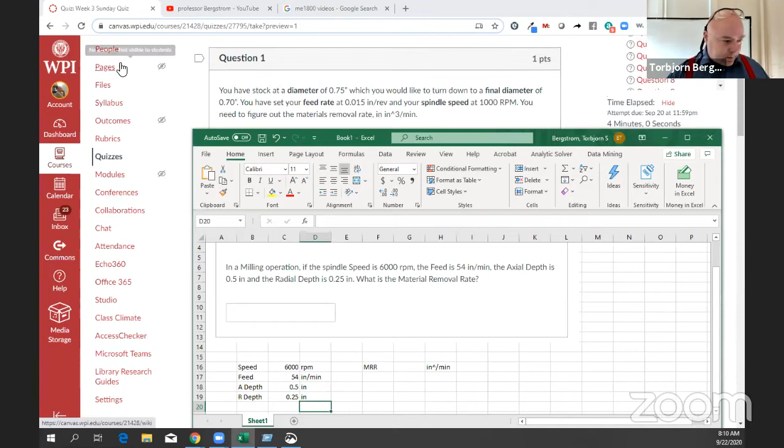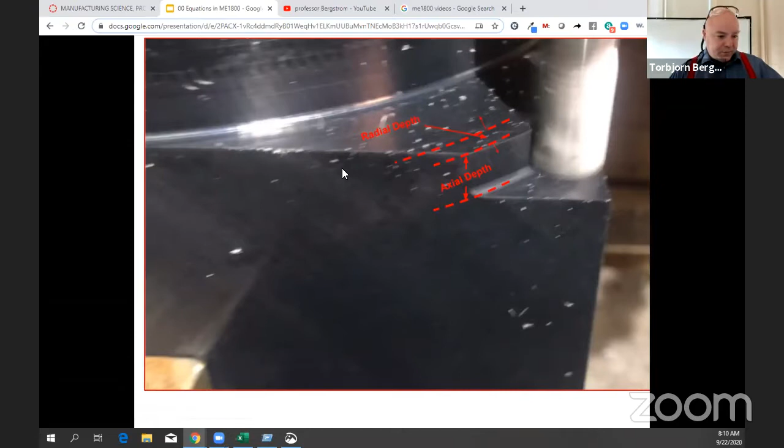So if we know the feed in inches per minute, we know the depth in inches, and we know the width in inches. Axial and radial depth, one of them is the depth down, the other one is the width of cut. I never remember which one is which, but I do remember that if I go to my ME1800 equations spreadsheet, ooh, it's labeled. Radial depth is the width of cut. Axial depth is the depth of cut. Okay, so now I remember that.

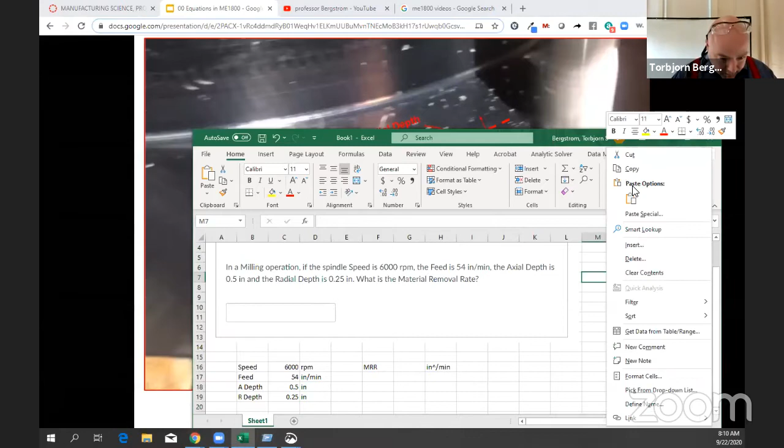And if I want to make sure that I don't forget that with my problem here, I can again snip that, copy it, and go back to Excel. I could paste that so that I don't forget that.

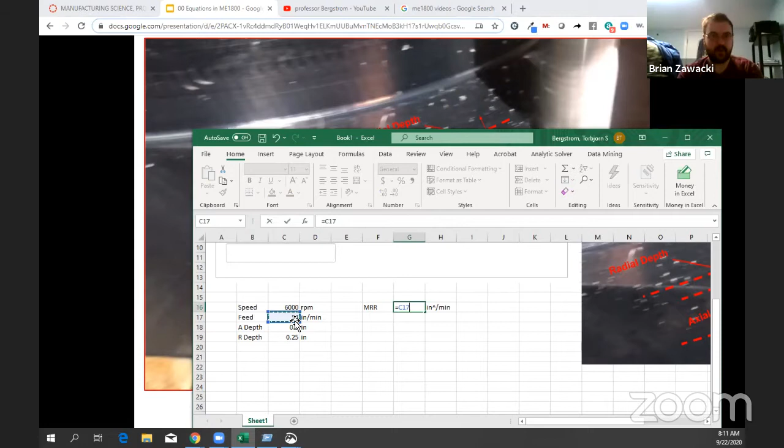But so if I take axial depth, radial depth, and multiply by each other, now I have an area, right? And if I multiply that by the distance per minute that area goes through, so this equals this one. Excuse me, I'm so sorry. Times this one, times this one. And the RPM was information you didn't need.

If this unit changed to inches per flute, though, you would need to know the number of flutes and the RPM to convert it to inches per minute. And that's probably what I meant to have you do, but the problem says inches per minute, so it's simply multiply the feed rate by the axial depth and the radial depth, you get inches cubed per minute.

And so that's what I mean for you to do. And then you could say, what is this? Material removal rate, and you could name the little sheet there so that next time you want to do a problem like that, you can come back to that sheet. So that's the intent. And we won't be collecting the Excel spreadsheet again unless you make some changes to it and you want me to look at it, and then we can just do that. But the idea is that you build a set of mathematical models that you can use in answering further questions, whether they're part of this class or for something else, and to learn the skill of doing that.

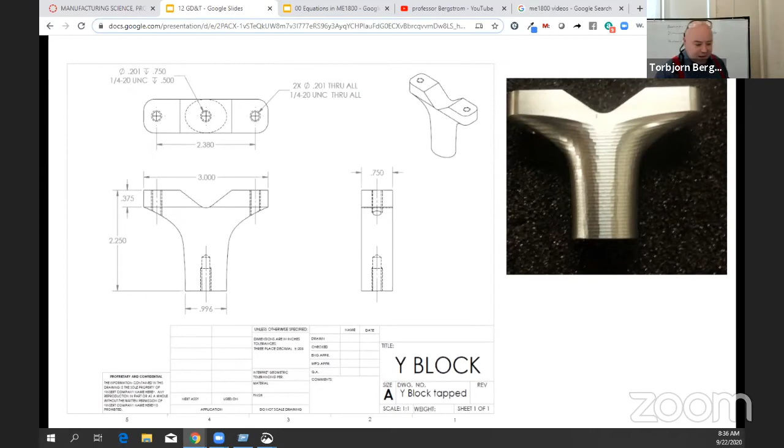So if I was going through one of those holes, what's the diameter of the holes? Those holes are 1.005 inch in diameter, right? Nominally. So the holes that go through the part, there's 4 of them.

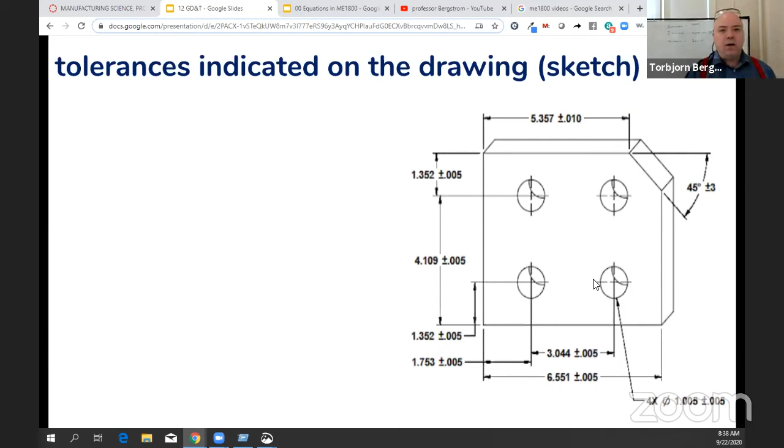Now what if I had a shaft that was 1 inch minus 0.01 inches plus 0? Then would it always fit in the hole? Yeah. Okay, all right, so I'm going to stop the screen share for a second.

So if I have my plate, it's got one hole in it, and we said that hole was 1.005 plus or minus 0.005. And so this means it goes from 1.010 to 1.000, that's the range the hole can be.

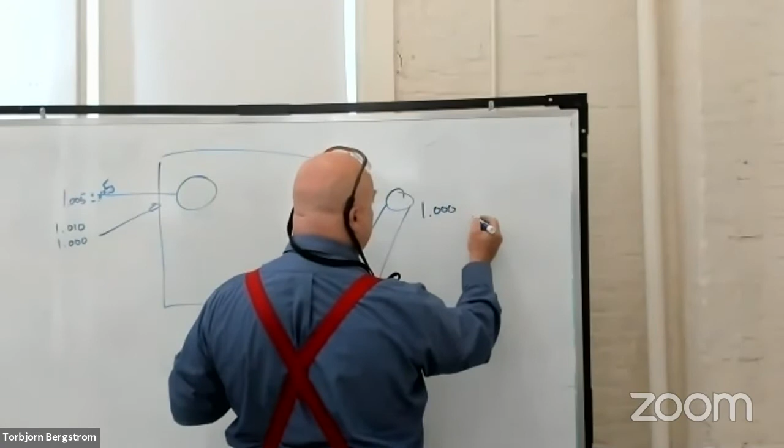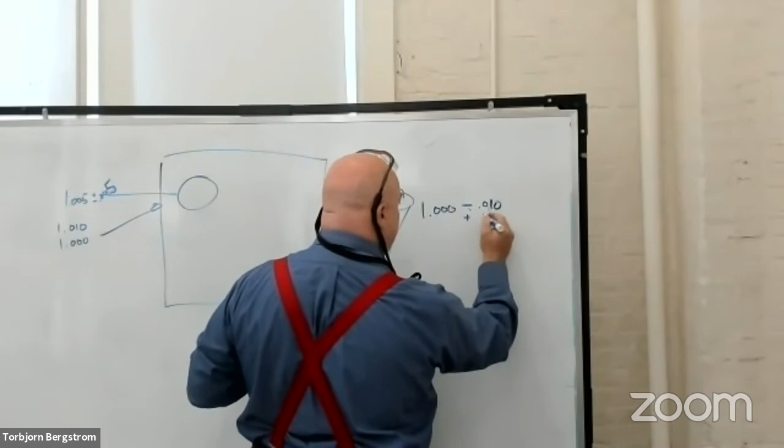And if I've got a shaft, and it is 1.000 minus 0.01 plus 0, then that shaft always fits in the hole.

And if we had 2 of these plates and we stacked them on top of each other, we could always put the shaft through and it could locate the 2 plates relative to each other, except they'd be able to spin relative to each other because it wouldn't orient them, but it would at least put them together.

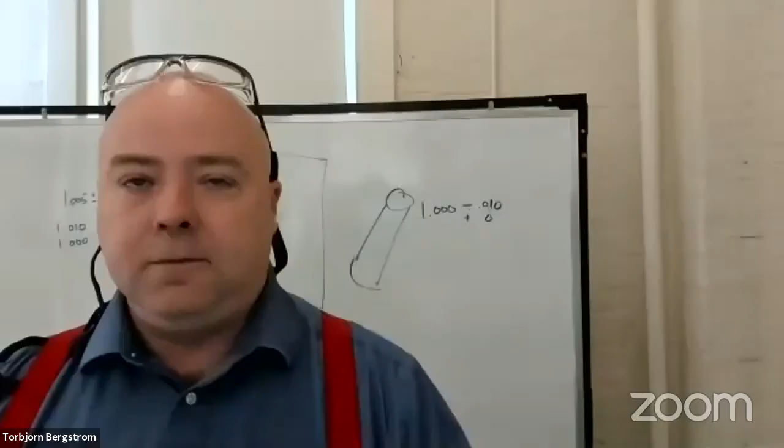Now, what if the shaft was bigger than the hole? Could I still assemble it? Maybe, but you probably shouldn't. I don't know, it depends on your intent. I could press harder and the shaft would go in the hole, right?

And we sometimes do that. We call that an interference fit, where we know the shaft is bigger than the hole and we want to push it in because we don't want it to come back out again on its own, we want it to stay there. So in this case, we want it to be a slip fit. We want the shaft to go in the hole and be able to come back out. We can put these things together, we can take them apart. Okay.

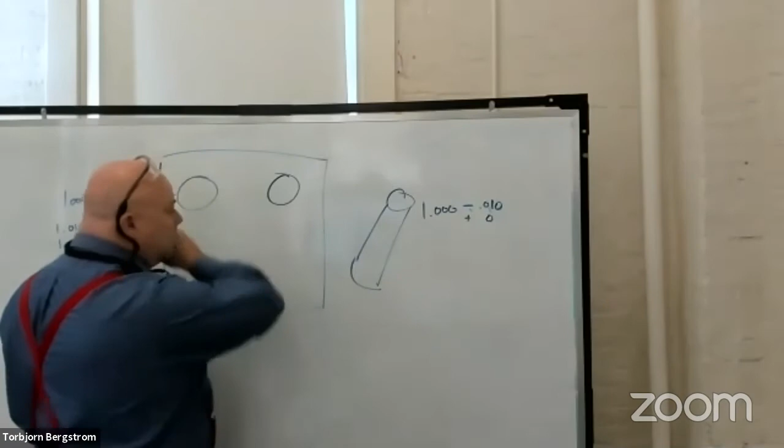But now I want to control the orientation also. So I put another hole, and now this is times what? 2x typical. Right? And so that applies to this dimension. So both holes have the same tolerance and dimensions.

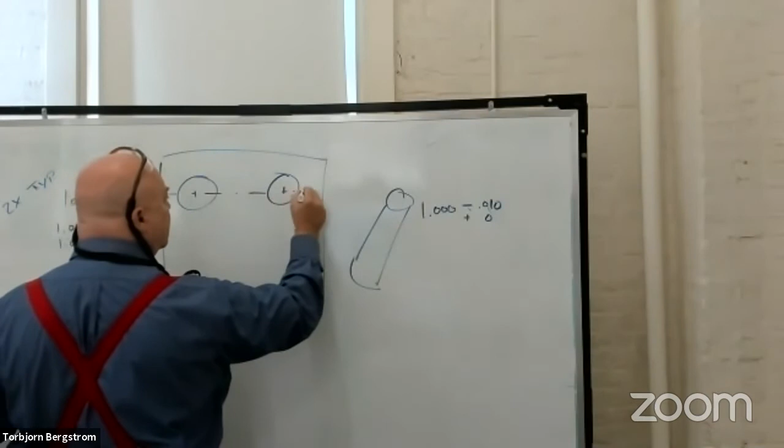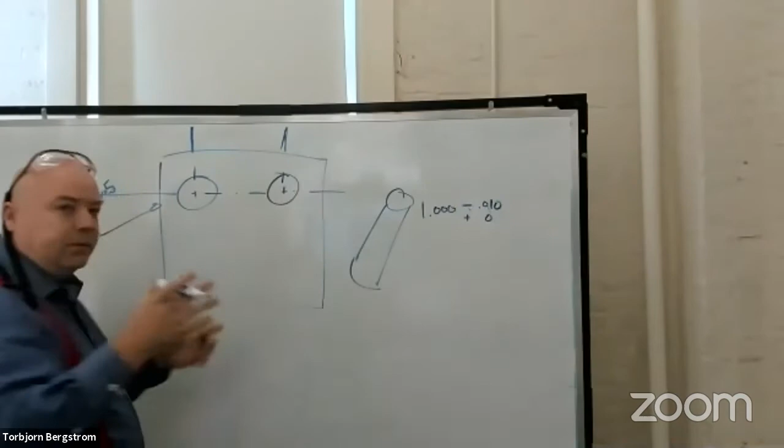What do I also have to do now? If I'm going to make the 2 plates, I'm going to make the 2 shafts, I have to know the distance between them, right? So I have to be able to measure this distance.

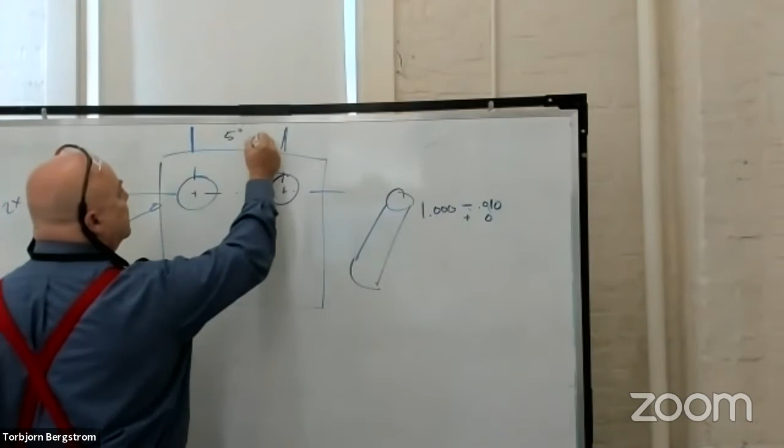In order to be able to assemble both plates together and put both shafts in, let's say this is 5 inches. What does the tolerance on 5 inches have to be? .01 inches, plus or minus. All right, so it's 5 plus or minus 0.01.

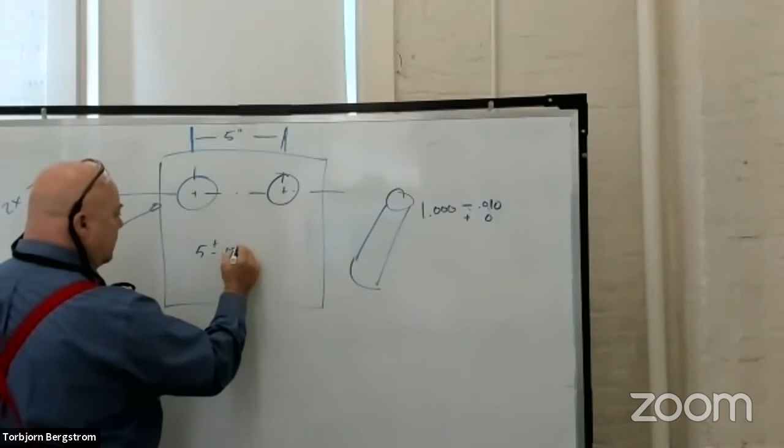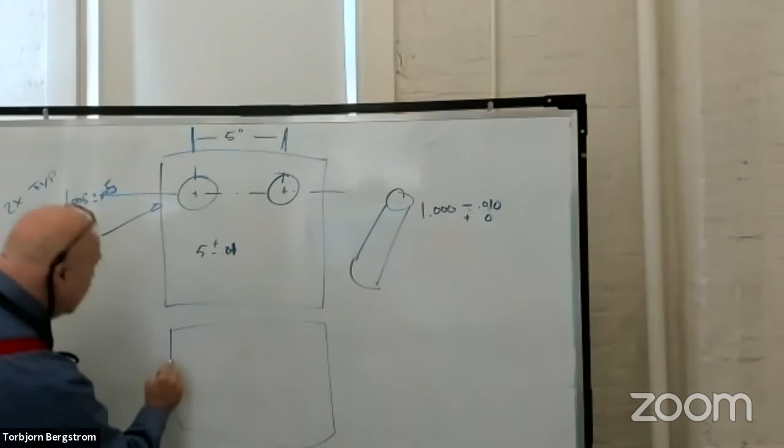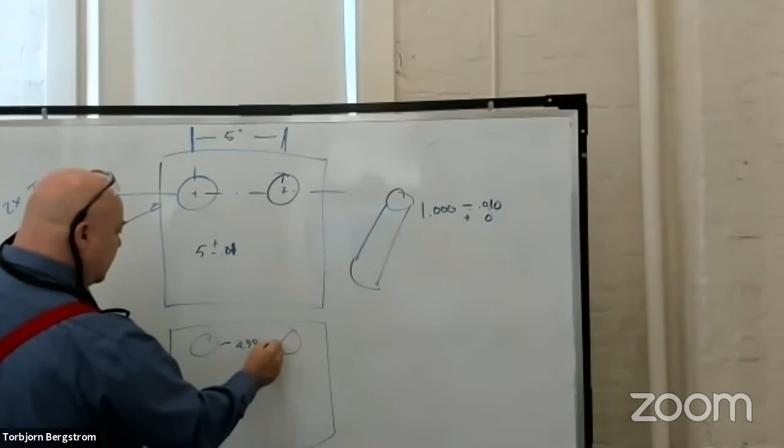So that means that they could be, so 1 plate, because now we got 2 plates, right, that are fitting together. This one could be 5 plus 0.01, and this one could be 5 minus 0.01. So what's that? 4.99, right? So this one's 4.99, this one's 5.01, and the shaft is 1.

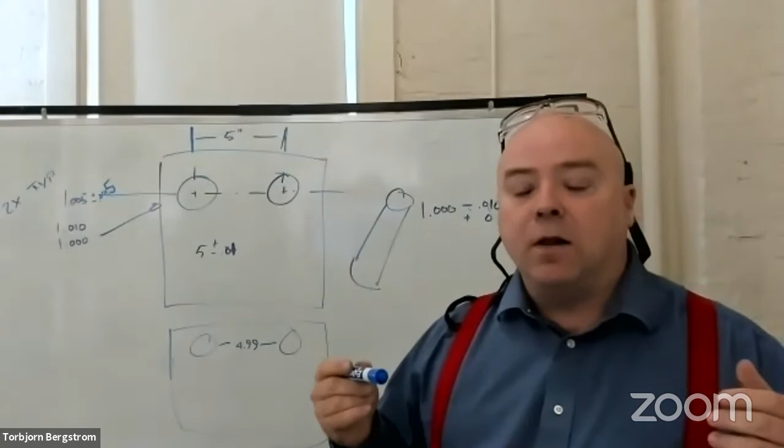Can we still assemble them? No. We'd have to make the shaft smaller or make the tolerance on location tighter. Is that correct? Yeah, we made the shaft smaller. Who's experienced this when putting together something, especially if you drilled the holes yourself and you're trying to put screws in? So you guys could figure out what the tolerance has to be based on what we know, correct?

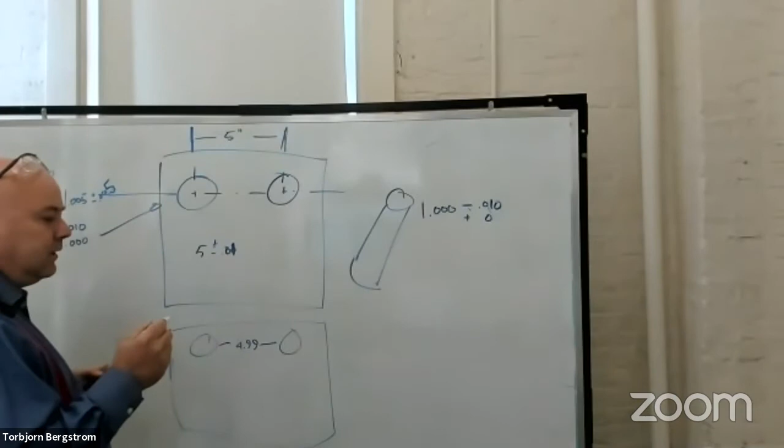So what happens when we add a third or a fourth hole? It gets a lot harder. It gets harder to understand.

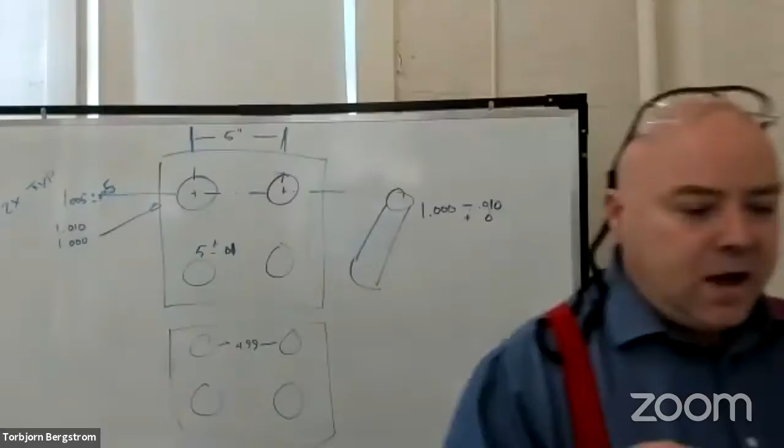Now, one of the things that we can do though is we can... but almost all of you said that you've designed something before, right? You've sketched it. I'm assuming that most of you that have designed and sketched something have also built something based on your design or sketch. Did you go and figure this all out every time? No. Did it always work? Didn't always work either.

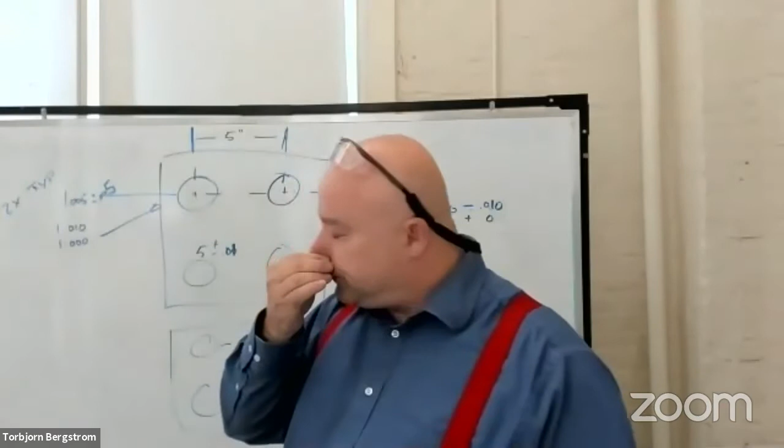So if you want it to work, you should figure it out. Now, do you have to? Yeah, you do. If you always want it to work, you should figure it out. Based on what we showed here, you can figure it out.

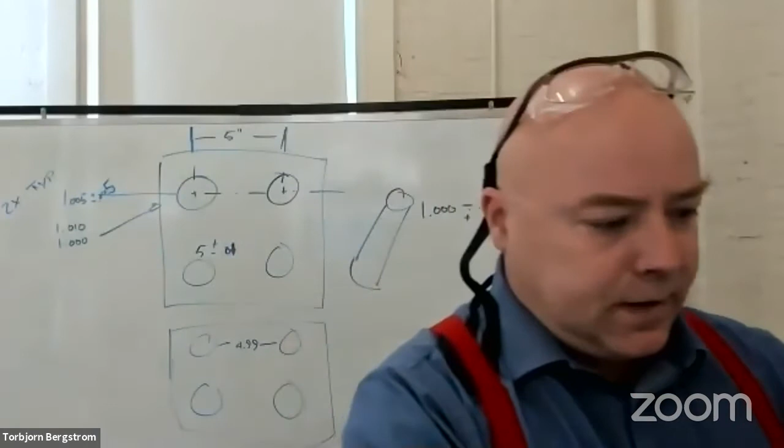So I've got a piece of stainless steel with a bunch of holes in it. I've got a dowel pin. If I put it in this hole, I can wiggle it around. Maybe you can hear it if I hold it up to the microphone. I put it in that hole, I can wiggle it around. If I put it in this hole, I cannot wiggle it around in the hole. The holes aren't the same size.

And what we've got here is we can standardize the type of fit that we're talking about so that we can discuss it. And so these are all slip fits.

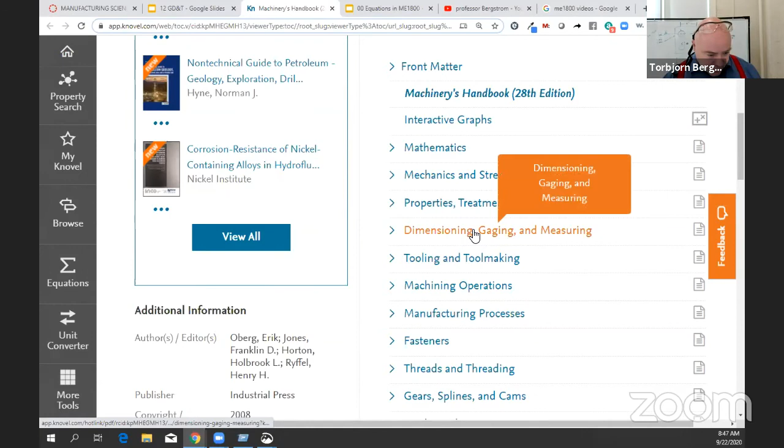And if we go to the Machinery's Handbook, oh look at that, I had a magic link. And the link still works. I made the slide a long time ago. Dimensioning, gauging, that's not the one.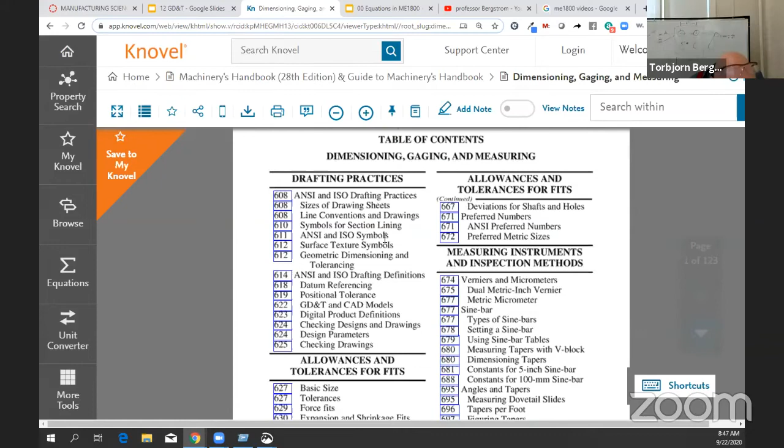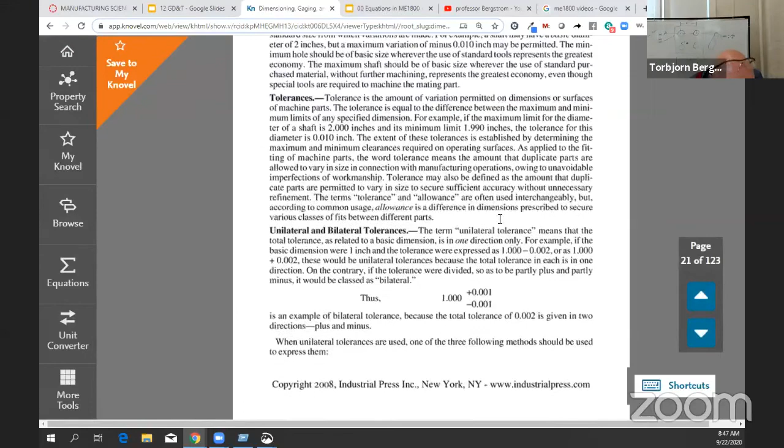So we learn about ANSI drafting practices. Here we go, allowances and tolerances for fits. There's a lot of text here, you can read it. There's a definition of a basic size, a tolerance. You might need to know that stuff. Unilateral and bilateral tolerances, application of tolerances. Let's get to the good stuff.

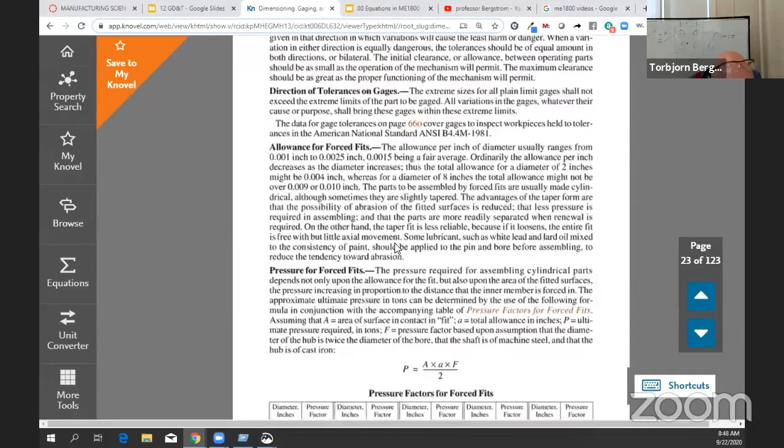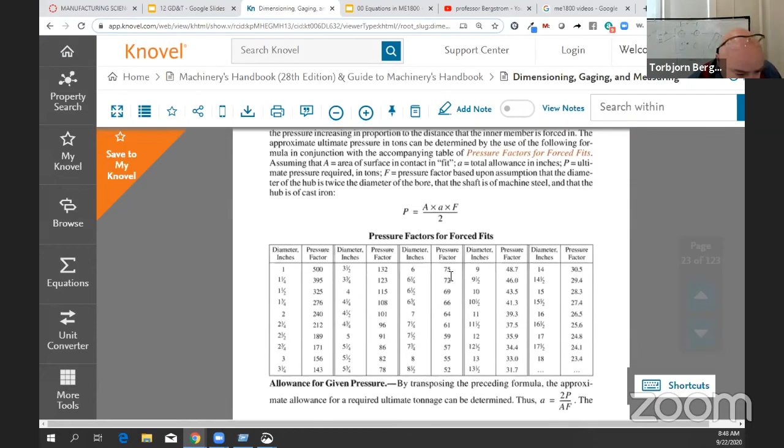Oh, here's, you can figure out how much pressure it would take to put those two things together if one of them is bigger, if the shaft is bigger than the hole. There's pressure factors for forced fits. How hard do you have to press on it? Let's see what else we got down here.

Factors for calculating shrinkage fits.

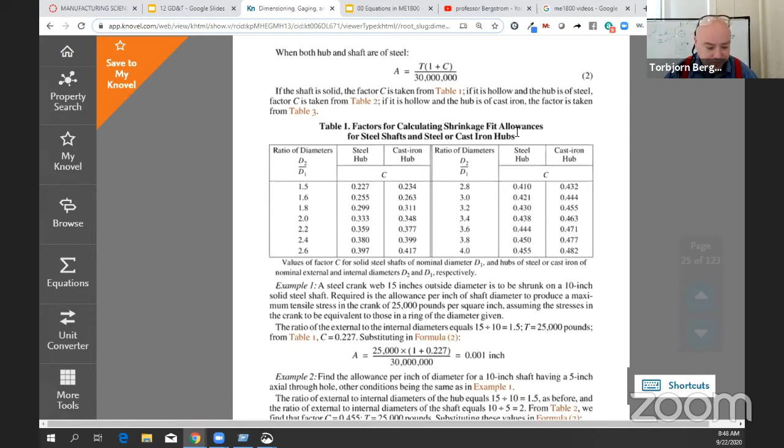Here's a cool thing: you take the pin and put it in the freezer, and you take the thing with the hole in it and put it in the oven, then pull them out. You drop the pin into the thing with the hole, and they both come to the same temperature. The pin has expanded because it warmed up, and the thing from the oven has contracted because it got cooler. Now those things won't come apart, but you didn't have to use pressure to put them together. It's kind of cool—they use that with rivets and airplanes a lot.

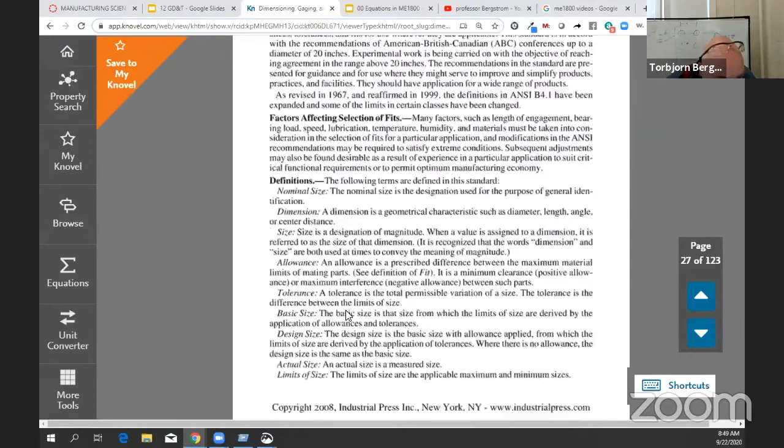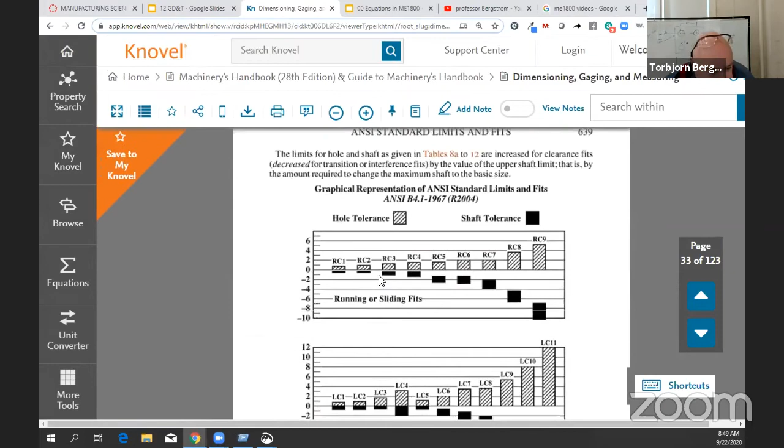Shrinkage fits, yeah, we can look at these things. But what I want to get to is down here. This is a graphical representation of some stuff that's in a table that's also in here.

The running or sliding fit means we want the shaft to be able to go in there and move around, and we can take it back apart again. These running or sliding fits can be qualified—this one is an RC1 and this one is an RC9, just like on the graph. In the RC1, we put it in and it doesn't jiggle. In the RC9, we put it in and it does jiggle.

The partially shaded stuff on the top shows how big the hole is. The blacked-in stuff on the bottom shows how small the shaft is. You can see there's a gap between the biggest shaft size and the smallest hole size in that RC9—there's a gap all the way down because these are running and sliding fits. That gap is the allowance, that's how much is allowed to jiggle in there.

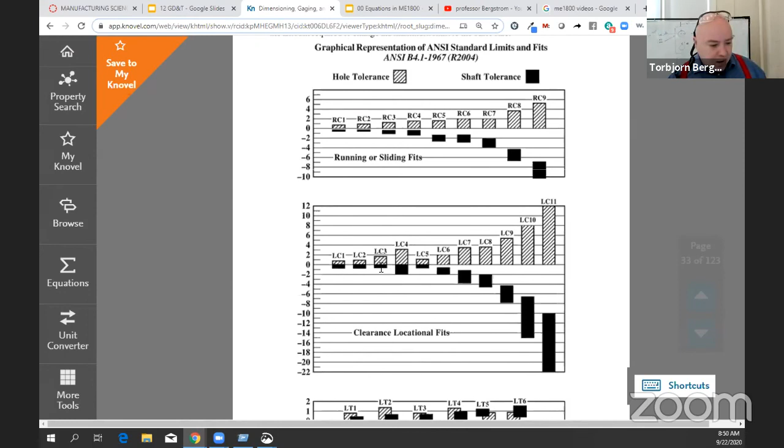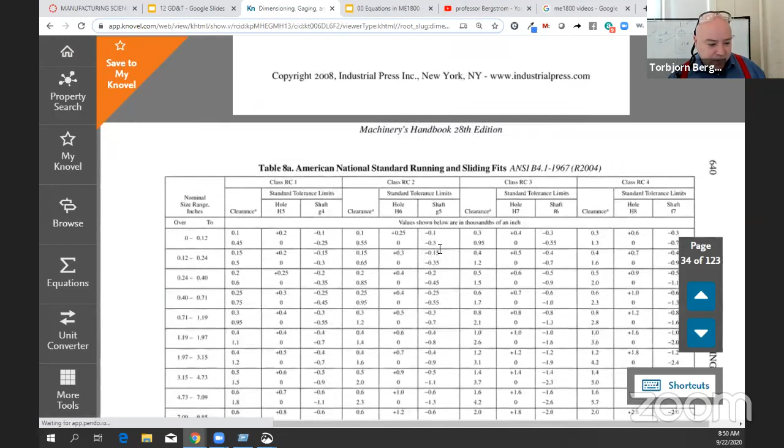You can find these numbers out, and then if you go to the tables—that graphical representation gives you an idea of it. But if you go down to the table and say the nominal size of my hole/shaft is between 0.71 and 1.19, then I can know the hole needs to be between 0 and 0.4 thousandths bigger, and the shaft needs to be between minus 0.3 and minus 0.55 smaller to get this type of fit.

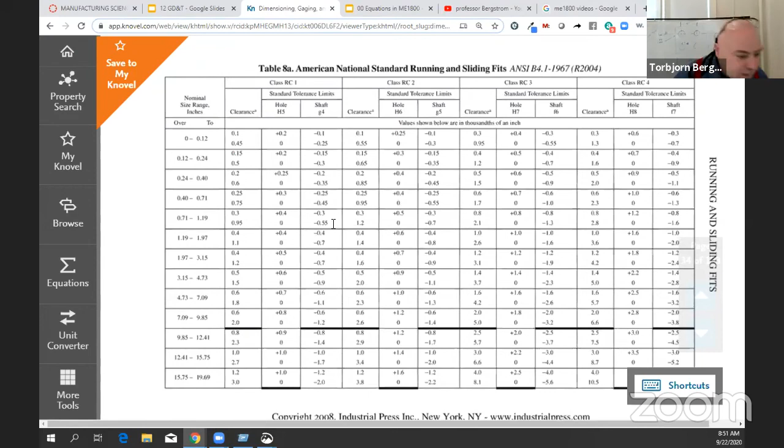These numbers are in thousandths of an inch. So what's minus 0.55 thousandths? It's about five-tenths of a thousandth. You've got to remember these numbers are in thousandths of an inch when you go through the graph.

Now, when you're designing a part for your MQP, you could go to the machinery's handbook and decide how big the hole needs to be for the type of fit you want. And if you've got four of these, based on what we drew on the board, you could figure out what the dimensional tolerance on the location of the hole needs to be so the whole thing fits together.

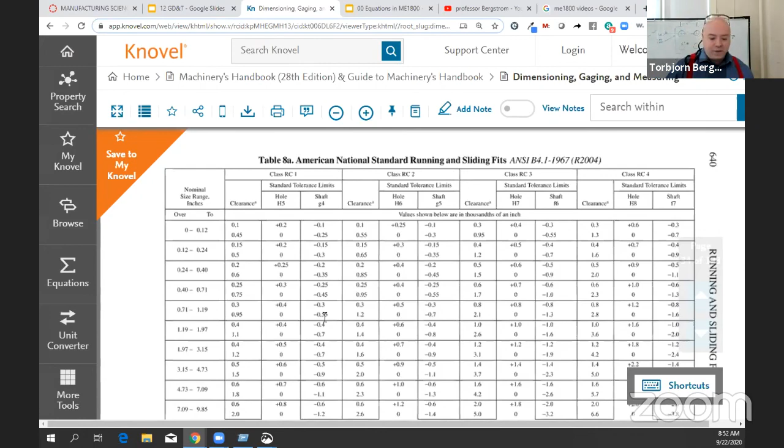All right, so look it up in the machinery's handbook. Let's go back to the slides.

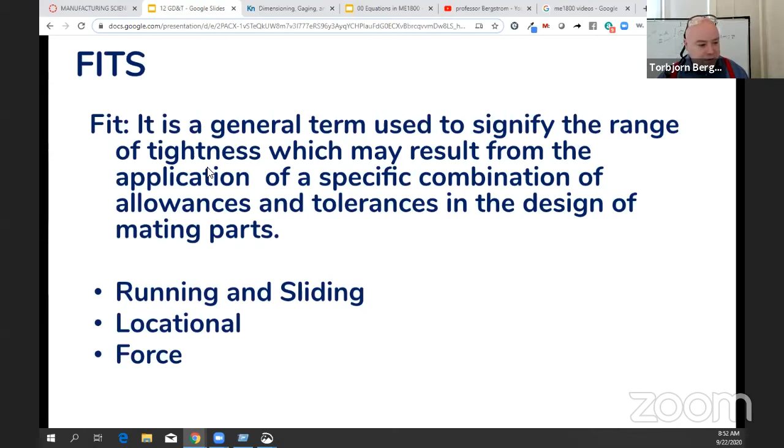Time—oh, it's almost perfect, because I was thinking I was done. I was just checking the slides to see if I missed anything. Yeah, we already talked about all this stuff: trueness, precision, accuracy. On Thursday, we'll start with this slide. I just want to finish up a little bit on this topic.

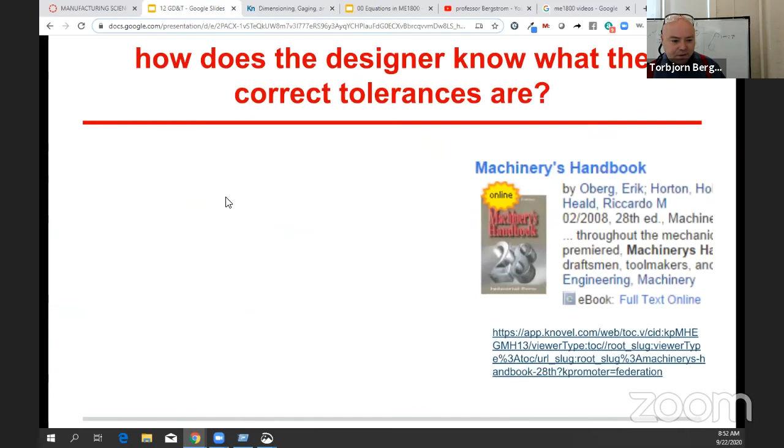I missed the last thing you said a few minutes ago—what did you want us to look up in the machinery's manual? If you're designing something and want to know the correct tolerance on the shaft or the hole you're designing, you can look that up in the machinery's handbook. It classifies it—those are as defined by standards.

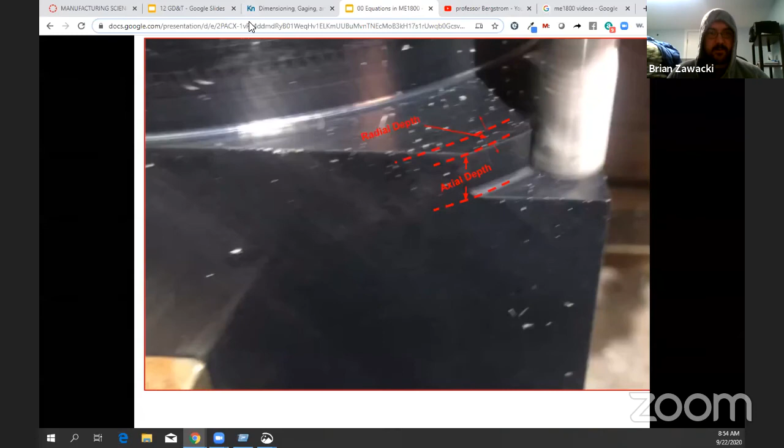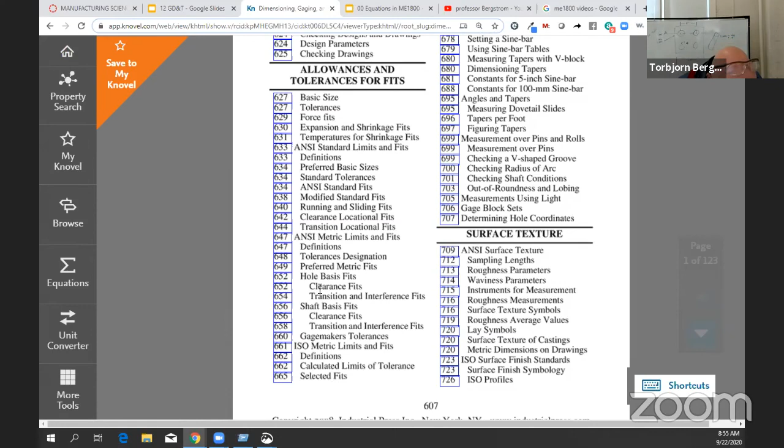So you want to find the section on dimensioning, gauging, and measuring. And then there's a section called allowances and tolerances for fits. The one we were looking at was down here, hole basis fits. I think this is where, somewhere in this range, is where we were. You can look through the section, but it talks about different types of fits and things like that. So we'll talk more about this as we do the functional design part on Thursday.

Cool, thank you. Professor, what would be the best way to measure the 5 inches on your part, behind the part you drew behind you? To measure the 5 inches between the holes? Yeah, the best way to do it.

It depends on the tolerance. So one of the things when we quote parts at our company, we won't tell you how much it's going to cost to make the part until we've figured out how we're going to measure the part, because sometimes measuring the part is as expensive as making the part.

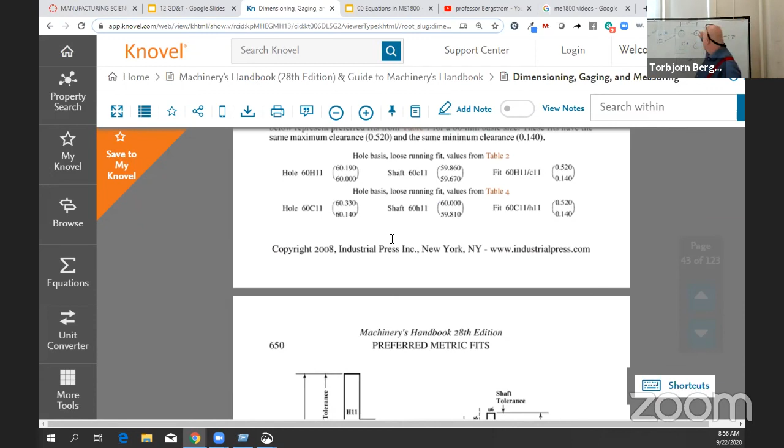So if your tolerance here was plus or minus a quarter of an inch, then you'd use a ruler. Just hold up a tape measure and say, yep, I got it. Usually I would measure from this edge to this edge with the tape measure. If it's plus or minus 0.002, I would use a 6-inch caliper to measure again from this corner to this corner or something like that. And then if I was really worried about it, I might measure to make sure the holes were actually the right size when I measure it from one side to the other.

If your tolerance is plus or minus 5 ten-thousandths, you might have a CMM, a coordinate measuring machine, but at 5 ten-thousandths, you're getting close to the ability of the CMM to measure it. What I might do is take a pin that's an RC1 or something, a locational fit, put the pin in, and then measure with a micrometer the distance from the outside of each pin, and then do some math to figure out what the centerline distance is. So it can be done, but you shouldn't have 5 inches plus or minus 5 ten-thousandths on anything. If the designer has done that, it's probably a bad design for location on the holes.

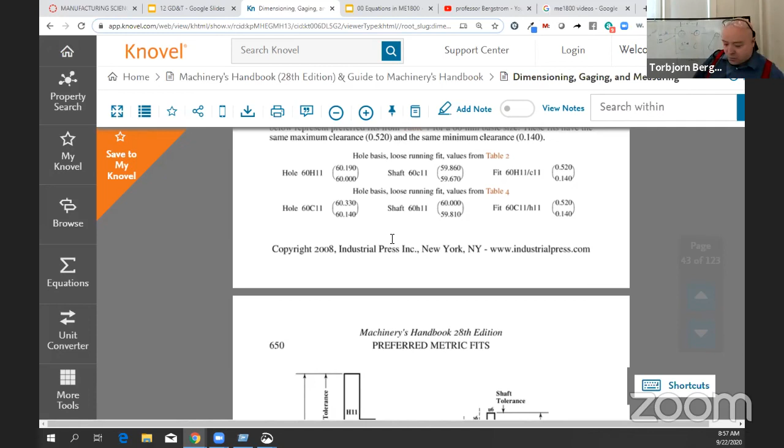But when we talk about functional design, we'll talk about a lot of bad designs that I've seen. All right, thanks. All right, cool.